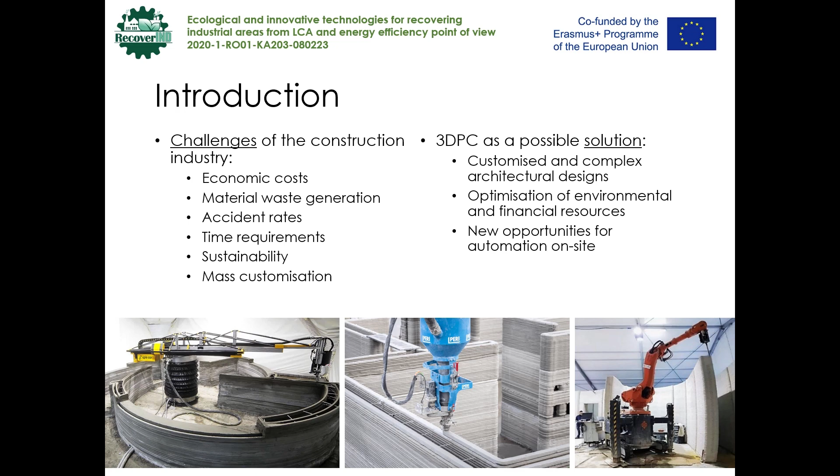This technology is the result from applying additive manufacturing techniques to the construction sector. It implies using construction materials and printing with robotic and industrial equipment in a larger scale than usual, and consequently it entails new research challenges to make this technology ready to be used on-site. In the next few slides, we will introduce the different topics that researchers worldwide are currently studying.

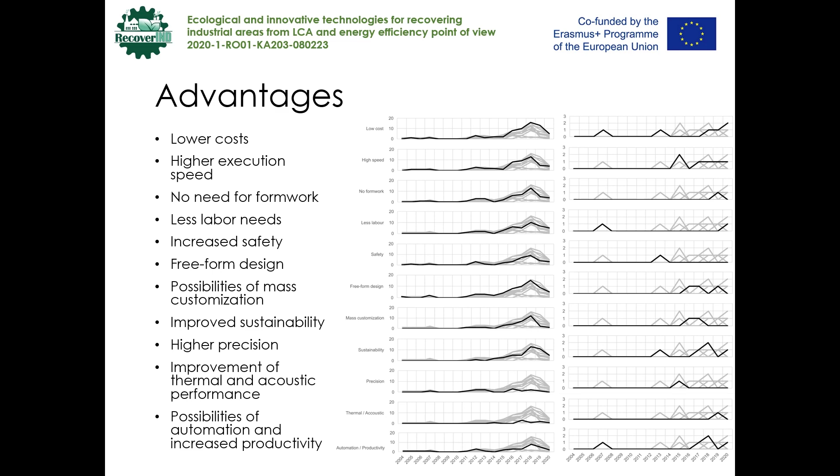These are some of the advantages that are usually attributed to 3D printed construction. On the right-hand side, we can see charts of the times each one of them has been mentioned in research studies, and the times they have been actually analyzed. From these charts, it can be inferred that there is an increase of research studies in this area, with some of the advantages being more frequently mentioned, but only some of them being analyzed, mostly those of a quantitative nature.

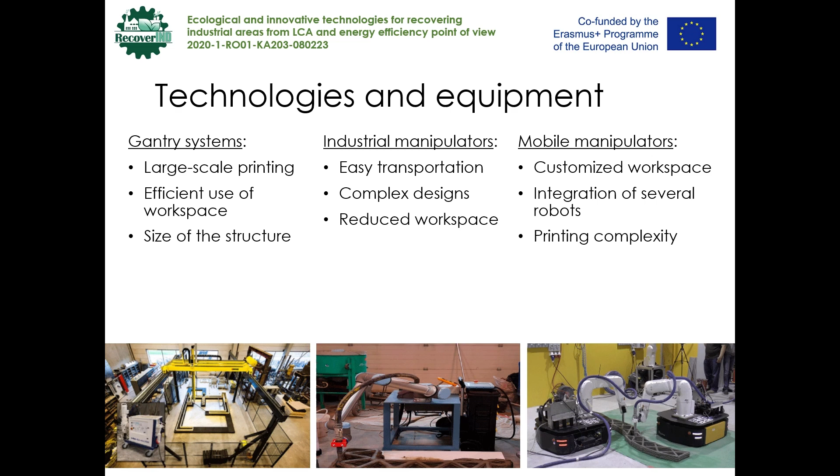Regarding the technologies used for 3D printed construction, there are three main approaches that stand out: gantry-based systems, which work in a Cartesian volume, industrial manipulators, whether for off-site or on-site printing with a limited workspace, and mobile manipulators as a solution to that limited workspace, which needs to be increased for on-site printing purposes.

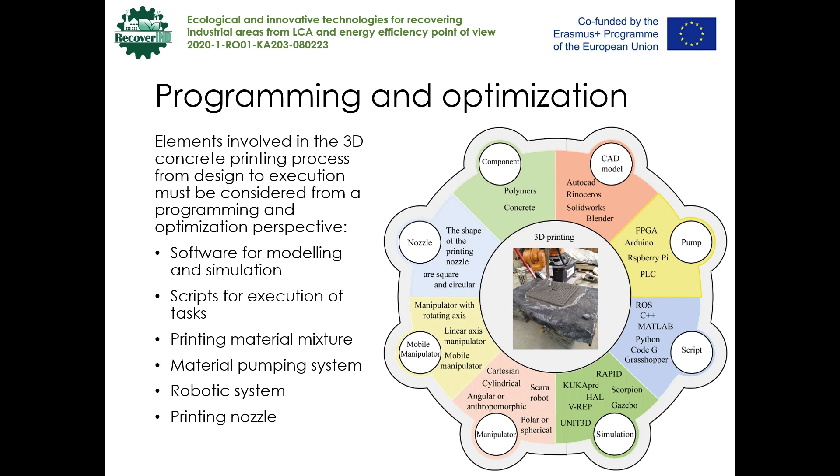There are numerous aspects that must be considered for programming and optimization of 3D printing tasks, from the design to the execution phase. The printing process involves software for modeling and simulation of printing tasks, scripts to communicate with the robotic system, features of the printing material, control of the pumping and robotic system, and even the shape and design of the printing nozzle.

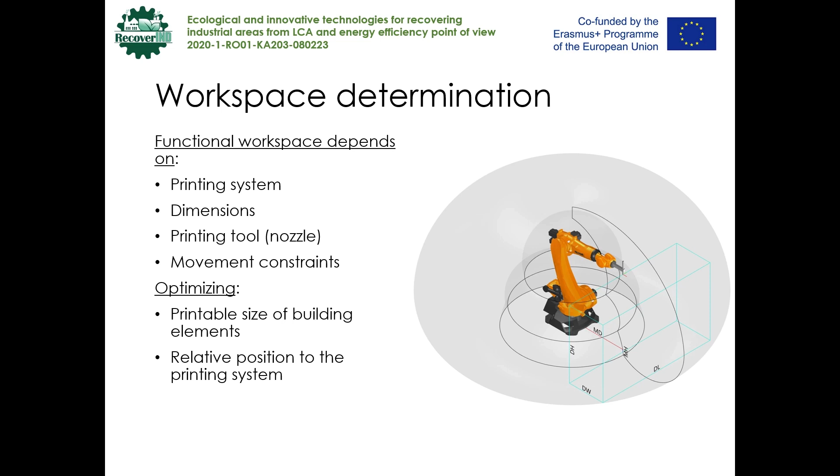The determination of the printing system's workspace is another field that is being explored. While it is somehow obvious in a gantry-based system, it deserves being analyzed when using robotic manipulators that work within a revolution volume.

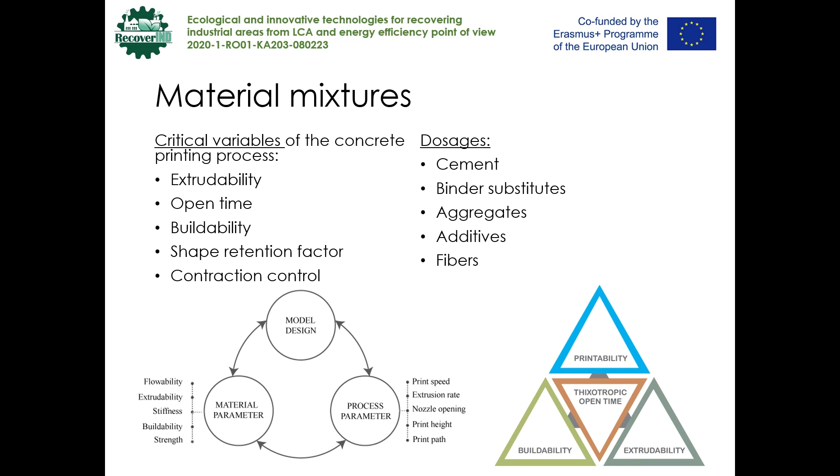The design of the material mixture for printing purposes is not trivial. It requires to be extrudable, but also to set and harden in a short time, in order to allow supporting the next layers that will be printed over in subsequent steps of the process. To that end, different features of the mixture must be controlled in different phases from its preparation, pumping, extrusion, and setting.

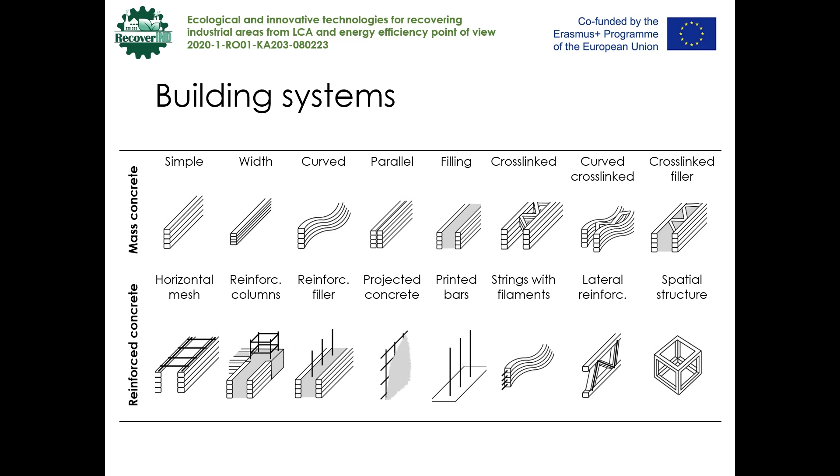A wide variety of building systems have been tested or are being explored, both based on mass or reinforced concrete. The latter has become a mainstream research field due to its importance for building higher constructions and given the complexity of including steel reinforcements during the printing process.

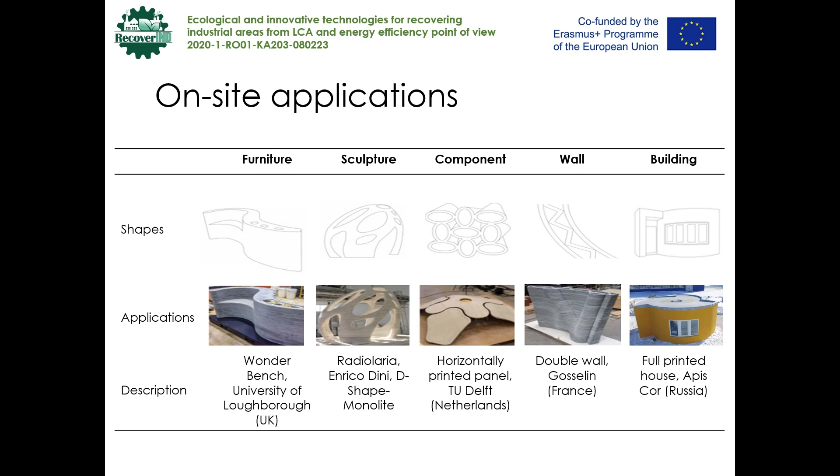Finally, as can be observed, a variety of elements with different shapes, such as furniture, sculpture, components, and walls, have been printed mostly at controlled environments. Printing on-site entails more difficulties to be overcome, such as being able to cover the entire construction with the printing system's workspace, working with climate conditions, configuring the entire printing system, or absorbing irregularities of the terrain, among others. However, there are already some examples of printed buildings worldwide.